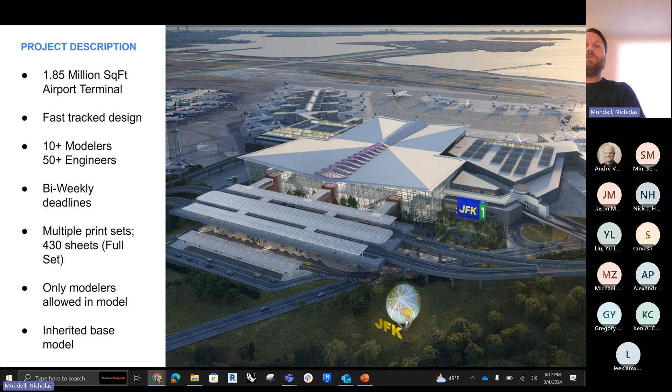Big project, fast track design, big team, bi-weekly deadlines, big set, only modelers allowed in the model, and an inherited project file. So a big problem for TT to begin with, I guess, or an opportunity is a better way to describe it.

The team was obviously very large for this, but I've actually got Adrian Paulino here from Thornton Tomasetti, who was the project lead. Glad to have you here, Adrian. Also want to mention Anna, who was also integral in this process, and the whole team we worked with. Thornton Tomasetti had a lot of subcontractors involved in this, and we had BIM modelers in the office working with us. So you can imagine how complicated the organization was to try and track and manage this project.

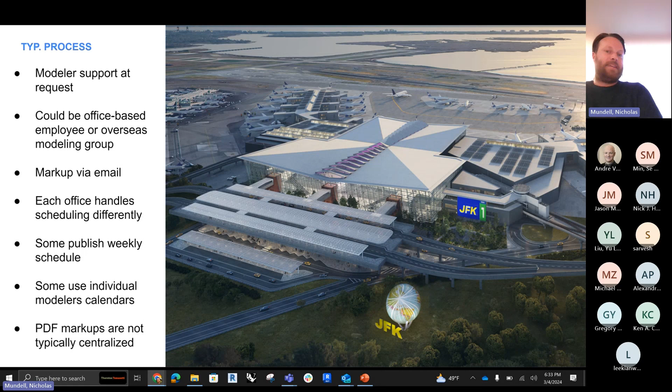All right, so typical process for markups is what we're talking about here. Nothing too fancy. A modeler gets requested. There are multiple offices working on this project, so understanding who was available at what time was not an easy thing. The markup was sent via email. Each office does scheduling differently. Essentially, there's lots of bullet points here that make this a hard problem to manage.

The first concept for the solution here, developed by the team inside of TT, was to try and leverage Bluebeam, the new Bluebeam Studio feature, which is multiple users editing a single file all at once. Sounds really great, but didn't really pan out that well on this project.

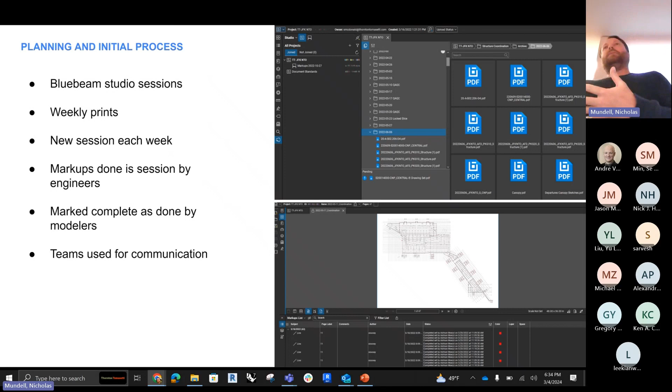So Bluebeam Studio sessions, weekly prints of drawings, new sessions each week. Markups were done by the engineers directly in the single Bluebeam file, and then essentially the modeler would come in and find a markup and complete that markup. So the single source of truth was the Bluebeam file in this case.

Microsoft Teams used for communication. Lots of problems with this process, lots of confusion, trouble implementing standards across multiple offices, sometimes conflicting markups, lack of consistency, generally just the sort of things you run across on a huge project with a fast schedule, and everybody's stressed and it's difficult to get things sort of accurate.

So the concept was to try and leverage Airtable. I haven't done much work with Airtable myself, but again, this is essentially just a web-hosted database that ties into an email service. So you can create markups, assign markups, etc., and it can all be handled through a web service as opposed to sort of the standard Excel sheet list of modelers that most people were using at that point.

It also had some of the features of Airtable they used in this project. So there was tracking and distribution, you could check the history of markups, certain areas of the building were assigned ownership by certain people, so there was more of a clear understanding about what people were intended to actually work on. There was a process implemented for back checking and having second round markups completed and checked. Daily prints, all still uploaded to Bluebeam project, but not necessarily used as a collaboration tool.

Eventually, there was an integrated form in Teams that allowed any emails, etc., messages coming from Airtable to pop up for people. And we also removed all the engineers out of the model, which I'm sure Adrian was a big fan of. Just modeler access at this point. I think we had a big enough team of modelers to make it work.

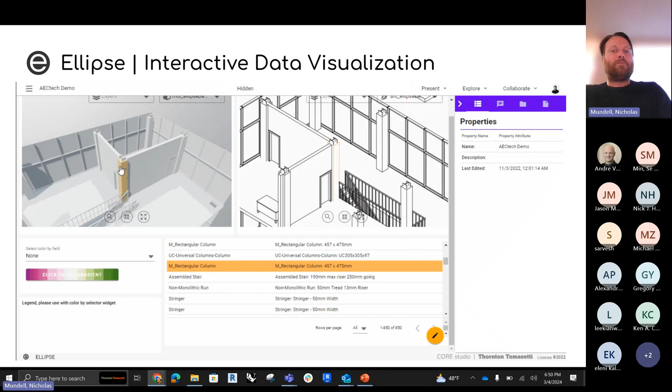Here's a couple of little GIF videos. Essentially, to describe what it is: what we're looking at is a website based on a Revit model that was uploaded to Ellipse. So you're going to see Revit views, and also a 3D view on the left, which is the Ellipse view. What we're pointing out here is all the information is still tied together - just like Revit, when you click on one object in one place, you're looking at that same object in every view that model or object exists in.

At the same time, BIM information is the key to all of this, so we have access to all the parameters, etc., that were present in the model that was uploaded as well.

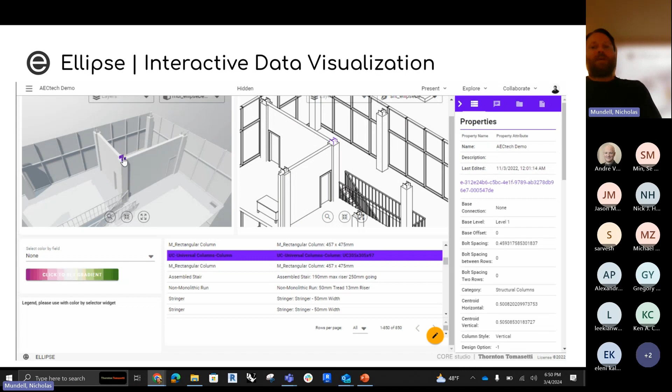So you can start to do things once you have this sort of set up. A really savvy Revit user could probably figure out how to make some nice filters and color-bys in particular views to mimic some of this interface. But our goal is that a pro user builds the interface and then nobody has to do any work after that.

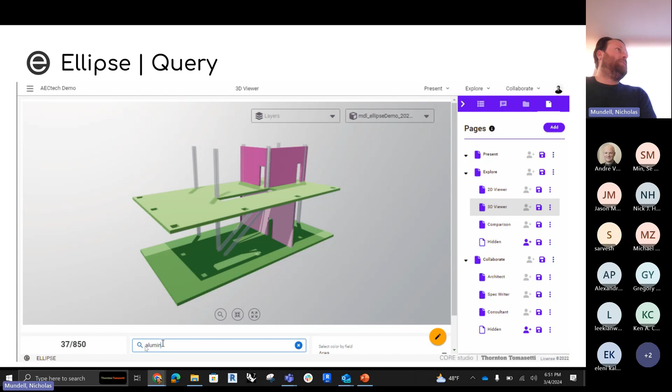And the next time you upload a Revit model to Ellipse, you can do the same query just through a text input. So we're looking at a 3D view where you can type in, show me all the structural objects, and it will highlight the structural objects. Show me all the concrete objects, and we'll highlight the concrete objects. Just pointing out that we have access to the data and the objects concurrently at the same time.

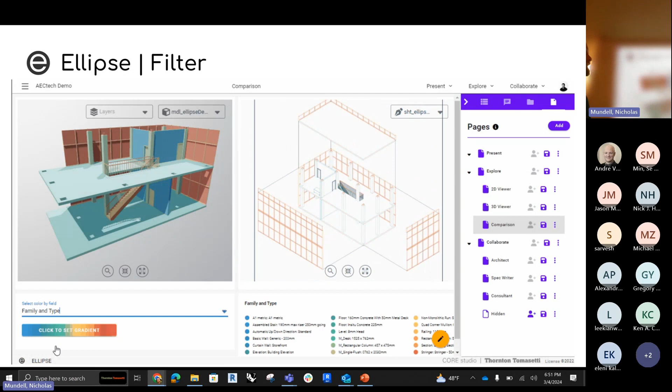So as I said, this was actually a Revit upload. What you're looking at here is a 3D Ellipse view of the model. So when we upload to Ellipse, we capture all the geometry of the objects. We visualize that with the right thicknesses and all the properties. But we also upload the 2D views from Revit. So that's actually just an isometric view from the Revit model.

In the background, these are still all tied together inside of Revit, and they're still all tied together inside of Ellipse. The data in the model is still tied to the 2D drawings. So you can create a filter in the 3D view, and it will apply to the 2D view at the same time.

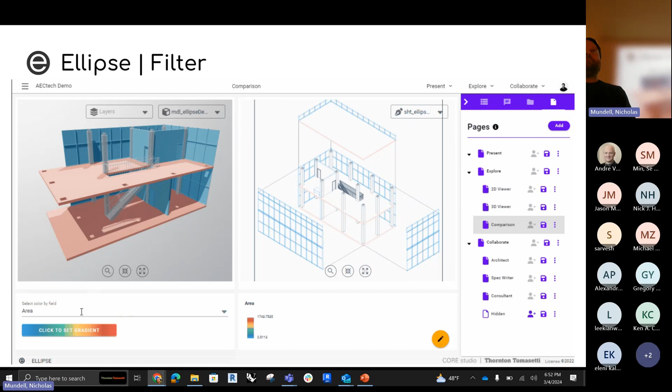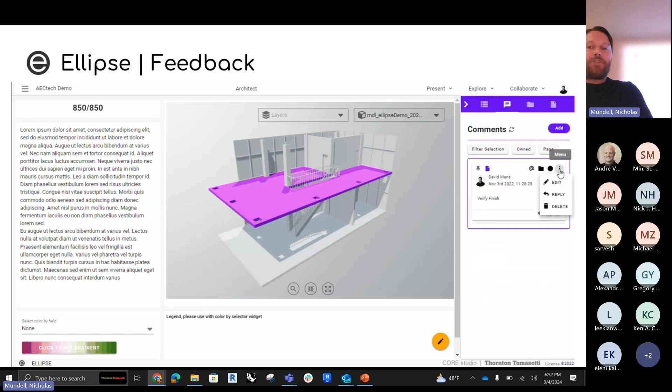We have a commenting system in Ellipse as well. You've got to be able to make a markup for somebody to do, right? So this one is object-based. I can click on an object in the view inside of Ellipse, and I can assign a comment to it. I can make changes to that comment, I can upload a file. Many of the things you just saw with Airtable can be done with Ellipse as well.

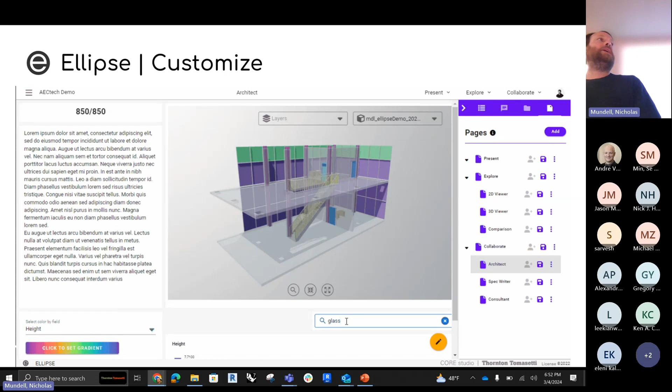And I guess we're thinking of it as multi-user, multi-industry. So you could build your own interface for the architect client, your own interface for the engineer client, your own interface for the actual owner as well. Depending on what information they want to see, you can allow or deny access to all that information.

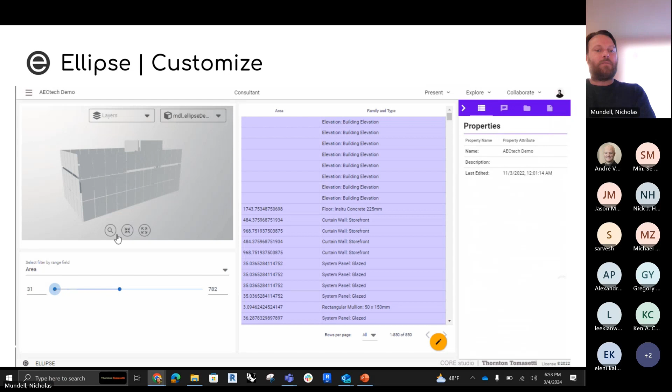So in this case, we're drilling down into all of the family information that's attached to it. And like I said, the 2D views are still zoomable. So when we upload, the 2D view is still present as a CAD object with a database in the background, so you can still select anything and view by their attributes.

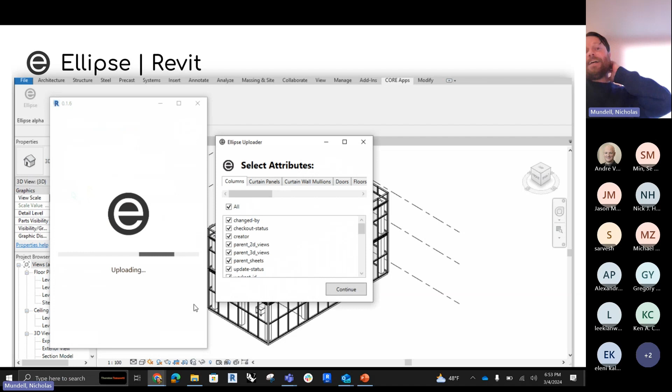This is how it works from Revit. We do leverage the fact that what we get from Revit is a highly detailed, information-heavy model. So you can choose which views you want to upload, which drawings you want to upload, which sheets you might want to upload. Those three object types can be uploaded to Ellipse. At the same time, all the objects that are in those views, we capture all their properties. As I said, that's sort of the juice behind Ellipse.

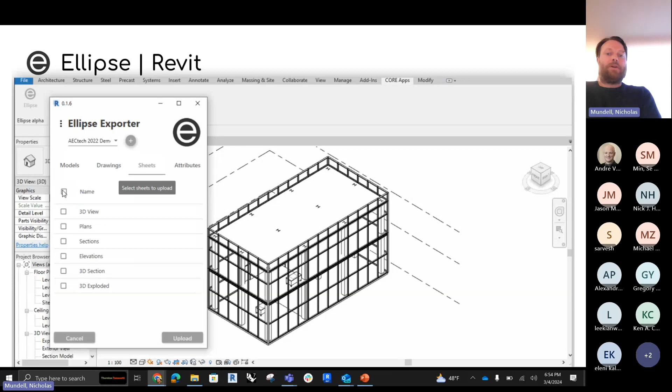And just a side note, we actually do capture all of the objects from the Revit model through Rhino.Inside's implementation. So all those objects actually get made as 3DMs that gets used by Ellipse. I know it's weird, but we like Rhino's kernel better than we like Revit's. So there's an exporter, right? You have to actually have a model first. Like I said, Ellipse is not an authoring platform, it's about showing you information.

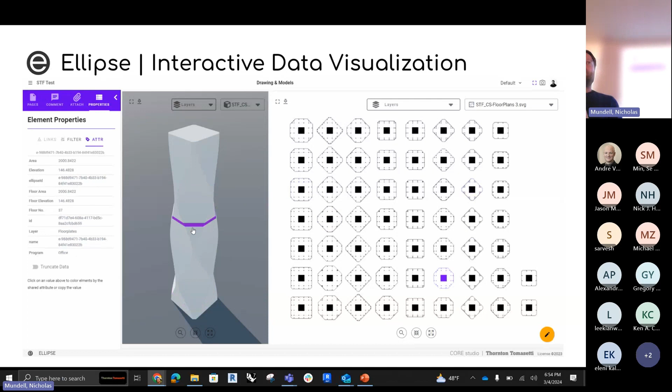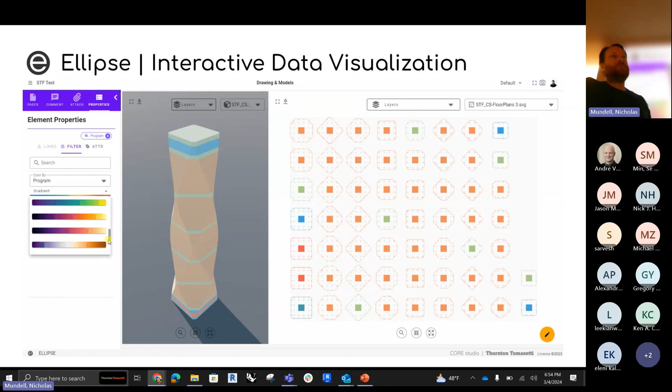This was sort of, imagine if in Revit you could have every sheet open in the project in one view and be able to filter by a single attribute through all those sheets. This is what we're showing here with this floor plate analyzer. These are all the floor plates of this twisty tower, colored by the view, colored by the 2D view as well. I think in our minds, there is a view of a structural model that is every sheet all at once in a single 2D plane. That's sort of what we're trying to emulate here.

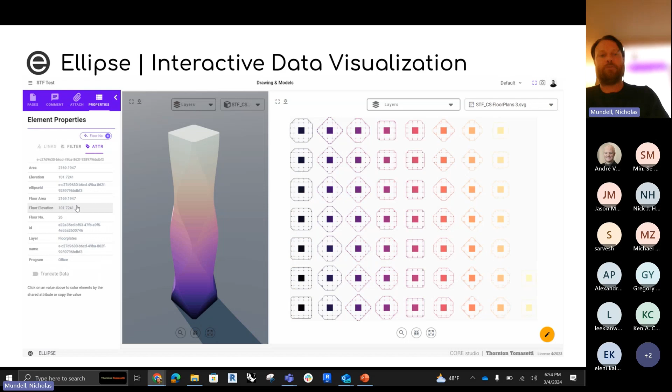Well, this is the upload I showed previously. Again, all these things are linked together, right? The Ellipse view plus is a combination of a 3D view of the model in the web plus a 2D view that was uploaded directly from Revit. All the objects are still connected.

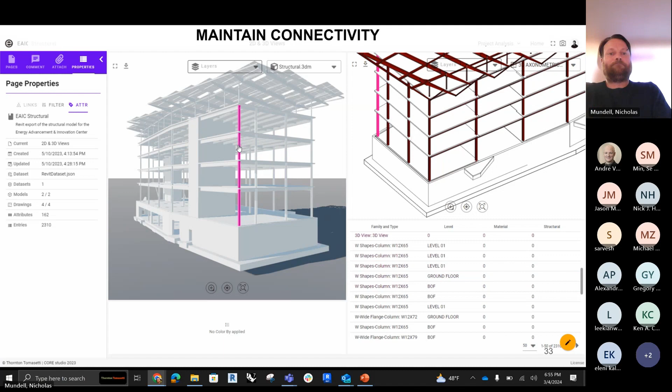This one points out where we're going here, with the fact that maybe in the future we can have drawings that have color on them, and maybe that's a useful feature. So in this case, this is the 3D Ellipse view, and this is the 2D shear wall drawing that TT made. We're able to color by the property, heat transfer coefficient, of those concrete objects, and also show that in the 2D view.

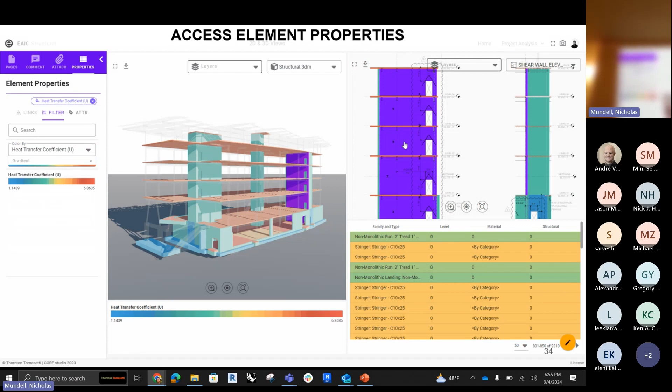Technically, you could probably pull this off in a single Revit file, but you'd have to be a pro user, and it's not going to look just like this. I think the real key for us is going to be the point where we start to do intelligent 2D drawings. We've been doing 3D for a long time.

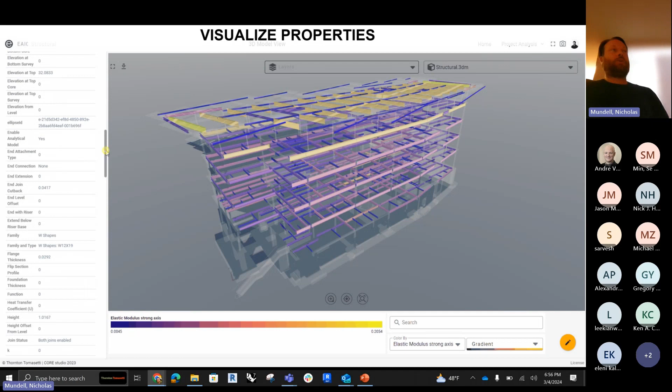This color by certain attributes is useful for engineers. We have models that have lots of really important information that is properties on an object, and it's not graphically present. How do you show the camber? No one's modeling the camber. It's an attribute, but you can color by it, and you can see where the deep cambers are and where the shallow cambers are by the color.

That same argument can apply to drawings. In this case, well, you can do more than just color by particular attributes. This one's sort of a QA/QC view, right? So, show me who modeled this object. Who was the user who added it to the file?

Similar to what the Airtable was doing about assigning regions, this one is actually picking up which user created the object in the Revit file. Color by creator, or color by changed by. Who changed the object since the last upload? Who made the change in that particular place?

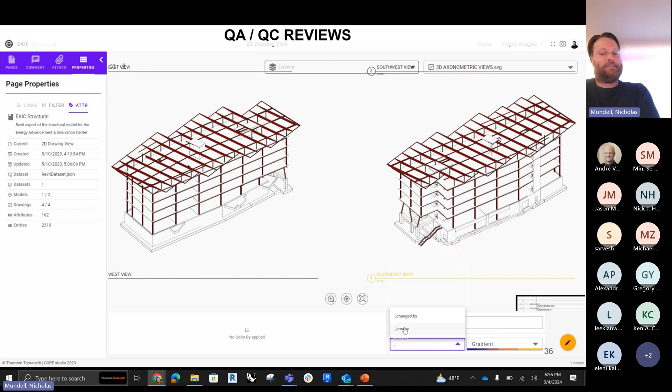We also really like the concept of dynamic annotation. As a structural company, we make these drawings that have tons and tons of text on them, the size, the forces, all that information. At the end of the day, sometimes this would be better served just being in a table somewhere, but we still have to tag it.

In this case, because the information is on the object, you can create the sort of markup you need, or the information you need, specifically from the data that's present. So any information on the object can be tagged just like in Revit, but this is just a little bit more user-friendly about what's being shown and what's not.

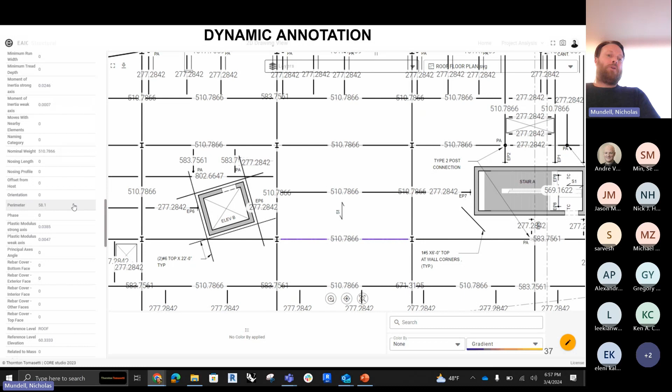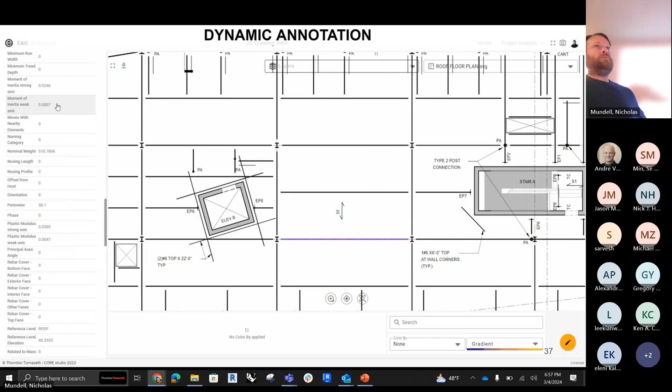In the future, we would love to deliver models to fabricators where we didn't make tag drawings - we just gave them a model and a table. That's sort of what the concept here is. Or we just give them an Ellipse project, and all the information is already there for them to download if they need to.

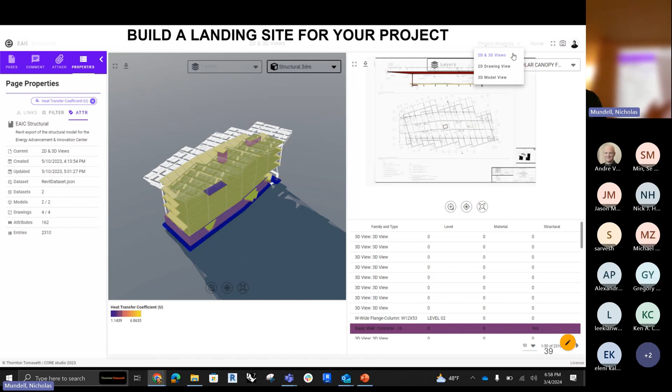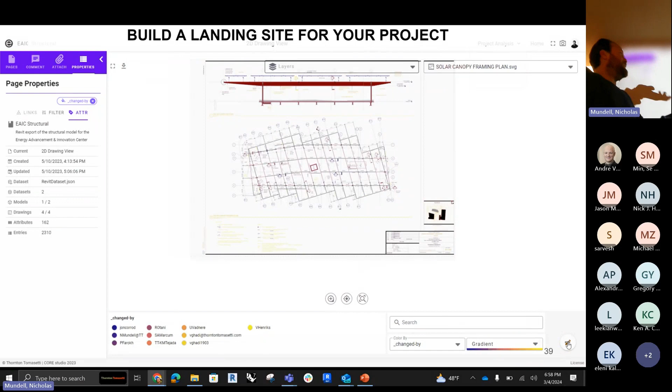So this is a pre-built Ellipse project that includes 3D and 2D views, and these are pages that are pre-built. So show me the 2D drawings, show me the 3D and 2D setup. You can reorder these things. This is a pretty familiar interface these days on the web, dragging around setting up your own interface, locking it for the next user to interact with.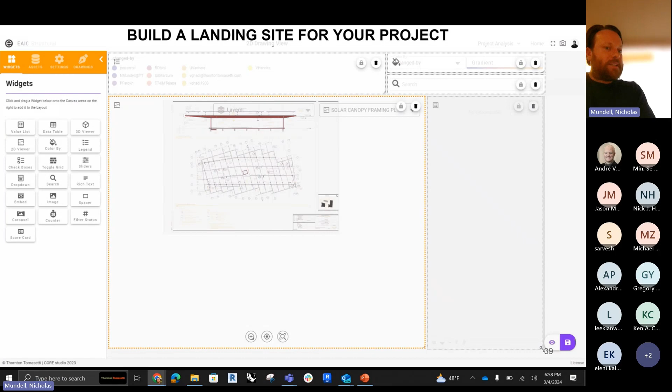We've got tons and tons of widgets - tables, value lists, 3D viewers. All the little boxes on the screen have their object types in the background.

So that's Ellipse. Like I said, we've been working on this for many years now. It's sort of our bet on where transfer of project information might go in the future, beyond drawings. We still think they're going to be created, but maybe there's a better way to interact with them. To me, printing out a drawing set, you've lost all the data that was attached to those objects as soon as you print it onto a page. So that last step seems to be a hurdle that we should try and avoid having to jump over.

But I think what we're trying to do, and we understand that when we work with fabricators, most of the time they're not using our model because they don't trust it. They'll rebuild it based on the drawings, probably, right? Someone's having to go through and interpret it. So this is sort of a baby step to not doing that.

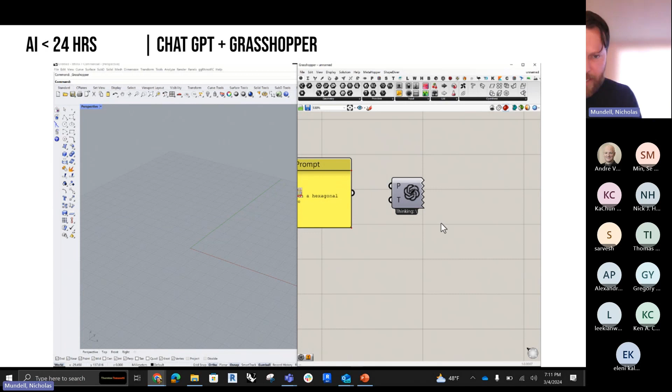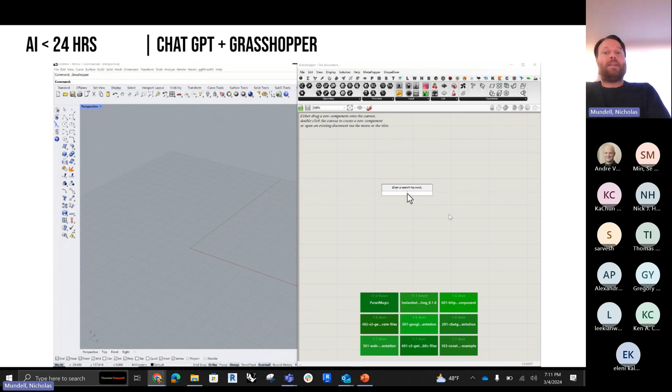So it's a component you sort of launch on the canvas with a text prompt. That was probably hard to read, I'll just let it play again. But basically it said, build me a tower with hexagonal format with these inputs. And then ChatGPT, because it actually knows a little bit about the Rhino interface as well as Grasshopper, is able to spit out some components that will build the thing you ask for in a text prompt. So this was technically a twisty tower with a hexagonal base.

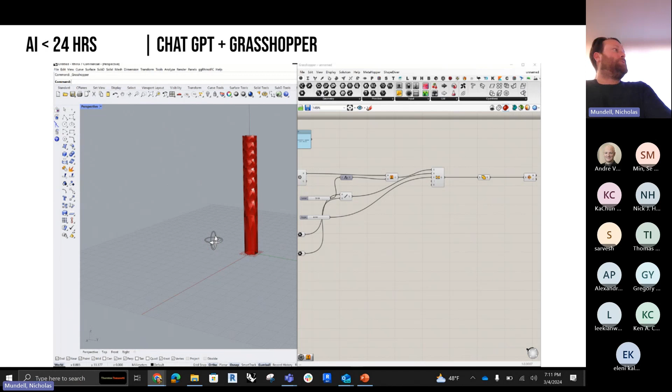And I double checked with the team here, this was legitimate. Sometimes you have teams doing a little bit of magic with editing in the background, but I did confirm that they did implement this and it works pretty well. The latest implementation is up on Food4Rhino. So this was something that the people who worked on it actually made free and available for other people to test, and I think I heard it's even being improved.

Best collaborative project, Furn-e. Having a cool logo and a nice slide deck is also part of a winning team here. This is the team, I don't actually have names for these guys I don't think. But essentially their pitch was generative AI.

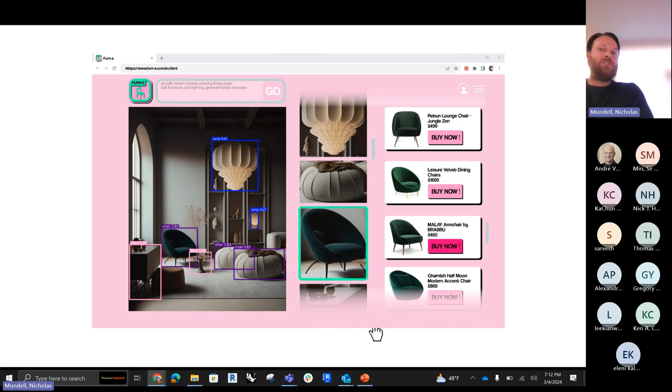This was October last year, which was getting a lot of press. And the question was, all right, if it's making these images, what happens if I want something from this imaginary hallucination in the real world? How do I find that lamp or that weird thing down there? I actually just saw a recent ad from Google where I think you can do this - if you make a circle around something, it searches it. Okay, so these guys built this back in October. They called it Furn-e, and the intention was take a generative AI image and then identify those objects from the image and then find the nearest possible thing on the internet to that thing.

And this is all about - live demo. So this is a web page they built: give me a variety of interesting living room interiors. So essentially in this case, I think they tied back into Stable Diffusion in the background, and it makes these crazy things. They click on an object and they go find something from a website that matches that. So, like I said, Google just released something like this recently.

This was intended to be specifically for furniture, to help people find and identify particular furniture types. It was a nice demo, and I think the tagline's good as well, right? Finding the real world from hallucinations.

All right, so best open source and the winner of the category - these were workflow solutions, which is interesting. I think the year before was really heavy into AI, the winner was a generative AI integration. But this year, the judges really liked people who were trying to make things like the Airtable project, just organize information better, find information better.

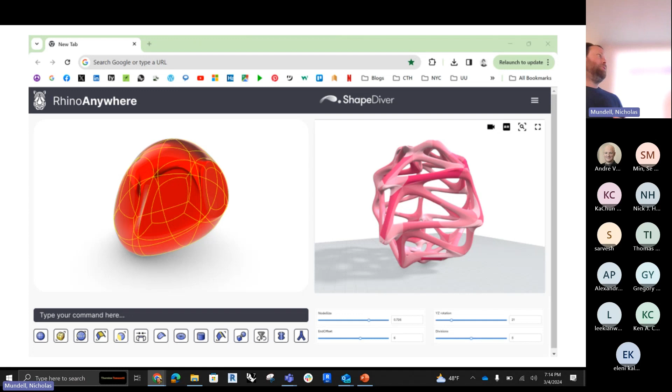Rhino Anywhere is leveraging something that we've been using in Core Studio for a while, the fact that you can now compute geometry using Rhino's library on websites. So the pitch here is we can take Rhino and put any backend on it, any body on Rhino. There's lots of examples out there at the moment, like ShapeDiver, who we've partnered with, essentially allowing you to look at a web page that is computing Rhino commands in the background - boolean the shape, make this curve, etc. It's all Rhino in the background, but it just shows up as a web page in the front. And again, the pitch here is that you can do it everywhere at this point - on your watch, Rhino; in the fridge, Rhino; on your 3D VR, Rhino.

Here's the team. There's a little bit of overlap here as well. You notice some of these pitches are the same across teams. Sometimes, in the middle of the night, something will crash and the pieces of one team will be merged with another team.

If anybody wants to look it up, all of this stuff is posted on GitHub. All the teams come in knowing that any work they do is public, so they're encouraged not to bring along proprietary cases. That always means some interesting conversations, like what can you give us while we're here in the building?

All right, best hack. I understand this one pretty well because it happens a lot on the projects I work on. It's called All the Way Down. Reactive data pipelines for iterative rapid design. Lots of words—basically, it's intelligent file management.

The rise of parametrics and curvy buildings has meant that people are building all these little intelligent scripts on their own machines. These things are hard to share, hard to understand who's got the latest version, etc.

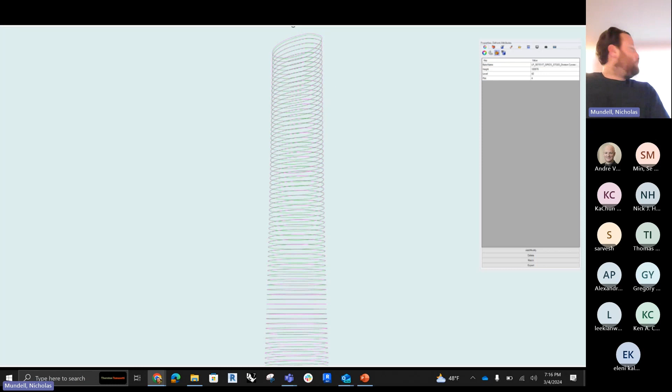On a Twisty Tower project, there's usually multiple definitions that control the geometry. There'll be something controlling the shape of the tower, then something building the facade division of the tower, and beyond that, a script instantiating a very specific facade system. Then, all the way down to fabrication, someone's hosting fabrication-level shapes on that object.

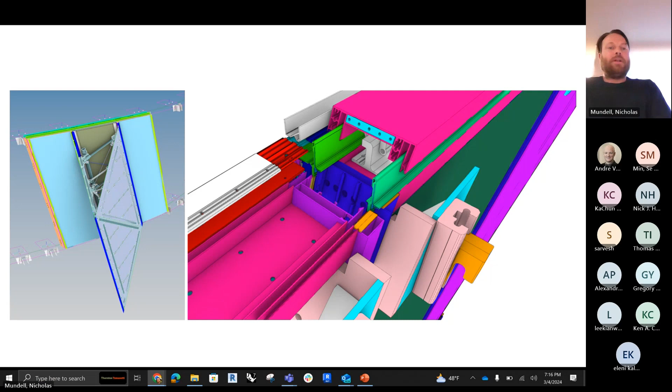Complicated models, complicated processes—doesn't have to be a Twisty Tower. But what it leads to is something like this: essentially lots and lots of independently developed, but theoretically tied together, Grasshopper scripts. This piece is doing that, this piece is doing this, etc. All of this is, unfortunately, still a GH file.

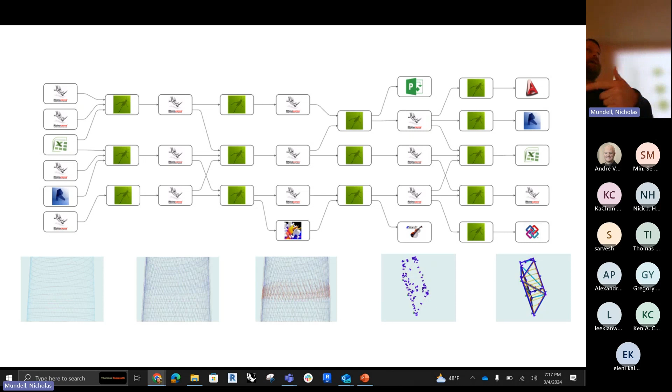There are ways of streaming Grasshopper data, but the intention here was to understand the connections between files and be able to understand the links between each of these little cells, and to either step forward, step back, and compute those files as needed.

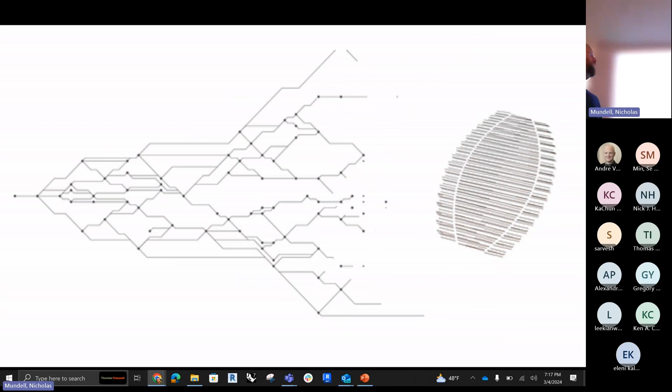Central place—so this is the problem, right? Branching scripts. Someone's developing the base script that holds the tower, but by the end of it, once everybody's had a go at the parametric world, there's tons and tons of scripts, and it's very complicated.

Basically, looking at a graph-based version of all these scripts. Each script is a node, each connection between scripts is an edge, and this gives you a graph network.

Once you know the connections between files, if something changes in this file, you can listen to the change and update automatically in your file. This is trying to put a layer of organization on top of a bunch of disparate Grasshopper files, so that one person can click a button and compute their colleague's file and get the latest information from it.

There's always an interesting tech stack involved in these. I won't spend too much time here.

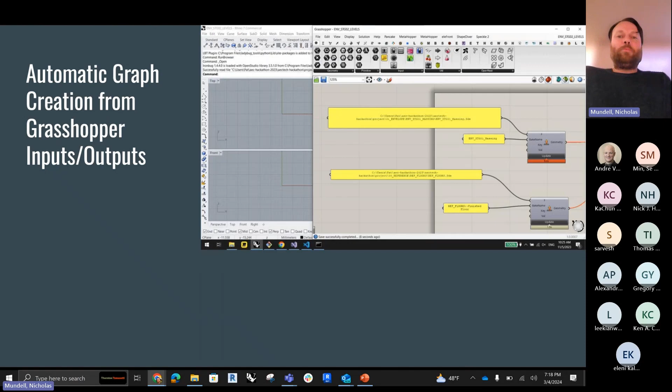Lots of text file creation at the same time as well. The format most popularly used by these developers, text files, is very easy to create, very easy to read. In this case, they were outputting from Grasshopper a text file that included the information they needed.

At that point, they can then build this sort of graph of the different files to use. I think this is a little demo file here—interfaces are never well built here—but basically this is pointing at different Grasshopper files on another machine, and they're able to say, go find this file and run it, spit me back the information.

Maybe your colleague went home for the night—they're not there to run the file themselves. You can grab it and get these computed and brought back to your own model. And the real clever part here is that only the things in your script that will change are the things that changed in the other compute.

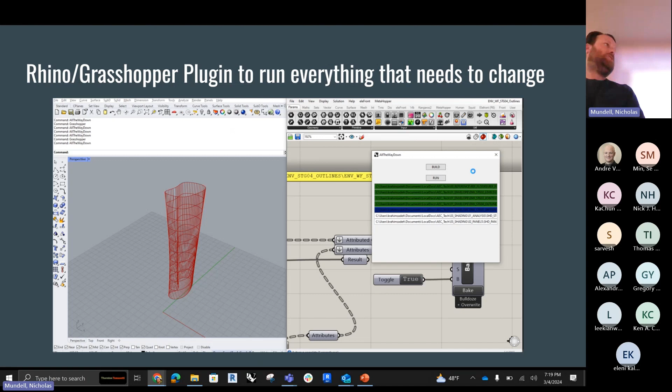All right, so here we go—there's a little demo. Build the graph, and that's going to show you all the information that connects all the scripts. And then it can basically run through each of them sequentially. Again, the key here is that these are located in different places, developed by different people.

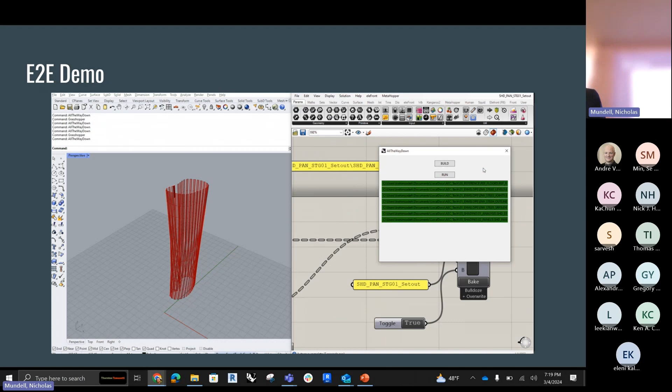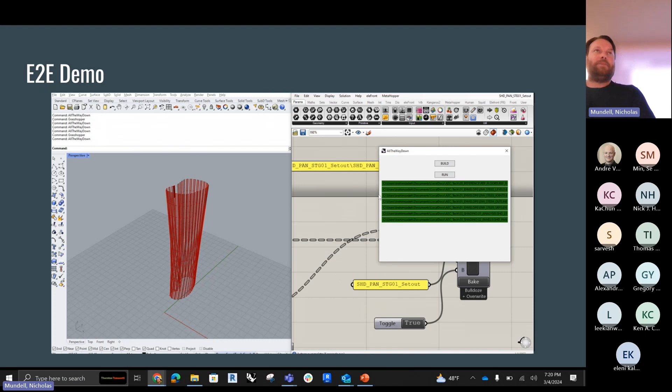This is trying to work towards the fact that at the moment, we still have a small number of pro Grasshopper users who build these scripts, but a lot of people who want to consume them but don't necessarily want to look at the script. So in a perfect case scenario, the engineer never has to actually see the back end—they just get the information they need computed out the front.

Their goal here is more robustness and distributed workflows. It's sort of a tool built for the hackers, I will say. Most of the people that have this problem are the ones who are using Grasshopper in their firms. It doesn't have to be just for Grasshopper, right? I think people who use Dynamo would have the exact same problem, probably the same need to be able to compute files from different places.

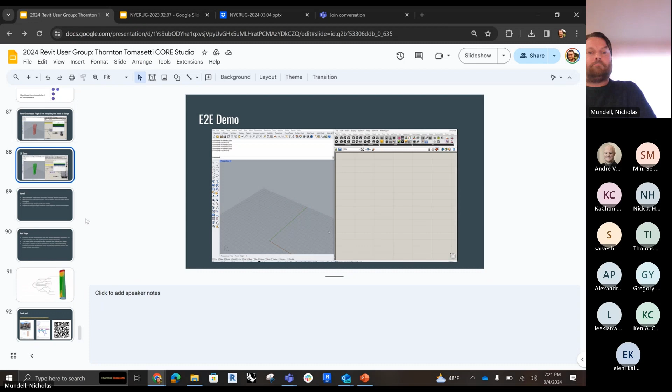I'll put, just because we'll use it as marketing, put the ellipse thing back up. Have you used this at TT? The graph thing? No, some of it, yeah. If I was on the team, maybe I'd be using it, but some of these things die pretty quickly after the weekend. Some of them live on, but so far we're using Speckle and Hops to do similar stuff, right?

There's sort of a ways around it. It would be cool if there was a dedicated tool that did it, but I never thought Grasshopper would last this long. So the fact that people are now building platforms to host Grasshopper scripts is just wild to me.

I'm sure the same thing would be useful in Dynamo. About 3 or 4 years ago, there was a hack project that tried to do it. It was called Hydra, and they were trying to do web hosted, so all the Grasshopper lives on the web, and you just solve it from a web call. Yeah, people don't really dig it. They want to have their own, inside my castle walls. Yep, that's fair enough.

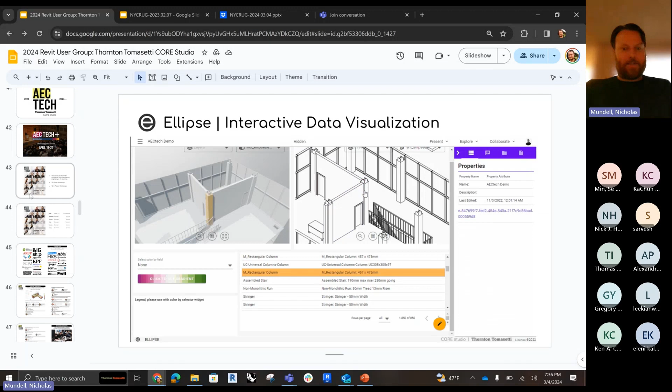When is the next hackathon in New York? November next year, 2024. We usually host it—yep, that's this year, so this was November 1 to 5. It's going to be around the same time, I'd guess, end of the year.